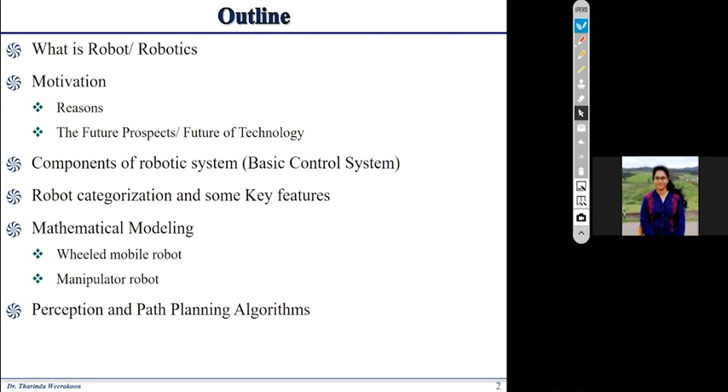And one of the main topics that we are talking about under that perception is path planning. Sometimes we use different words, navigation, motion planning, trajectory planning, and all those are related, but they are different things. We will discuss those things today.

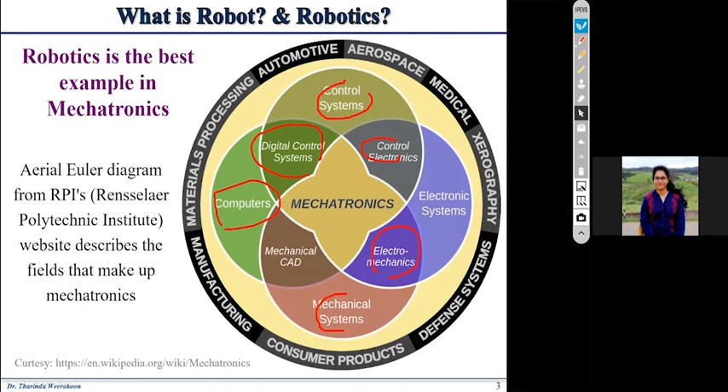So that is mechatronics, and the best example, people in this field say, is robotics. So if you are going to study robotics, you have to study all those things. It's a big challenge, but interesting, and there are so many advantages. We will discuss those things in the coming few slides.

So then the motivation, or why robotics is important, why we should study robotics, or why you have selected to study robotics. I have selected a couple of reasons that you may or may not have thought about before, but from today, you can think in a different way why robotics is important for our society. The first one I have selected is a sustainable food future by 2050. There is a big connection of robotics to this first reason. The second one is industrial revolution. Now we are in the era of Industry 4.0, as well as moving towards Industry 5.0.

Or somewhere in the middle of Industry 4.0 and 5.0, right? We will discuss the key role of robotics in Industry 4.0 as well as 5.0. In addition to that, I have given two other keywords, right?

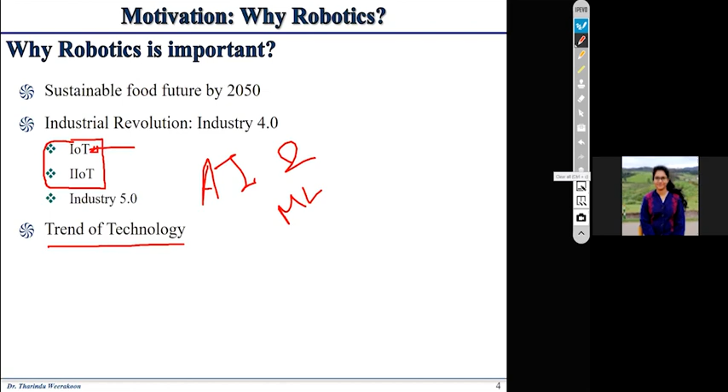Okay, so with that motivation, what we have to analyze is whether we can produce that amount of food. So now, I think you can see my writing, right? Yes, sir, we can see.

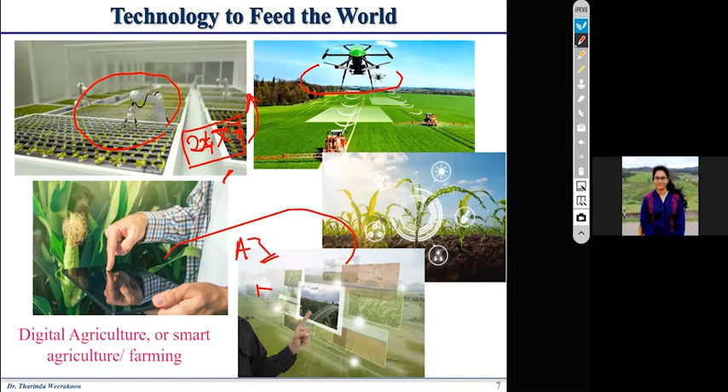Okay, so with that, we will move to the next one. Next reason: the Industrial Revolution. So now we are here, in between 4.0 and 5.0. Even though we are talking about Industry 4.0, we are actually in between those two phases, or in the transition period. This indicates there's a big role for robots to play. Not only that, if you compare with Industry 3.0, those were automated; these are autonomous, and they are connected to the internet. That's why IIoT becomes a hot topic nowadays. Industries are connected through the internet; industry is one element in that network. Therefore, it's very important to study robotics and related fields: AI, machine learning, computer science, and all those things.

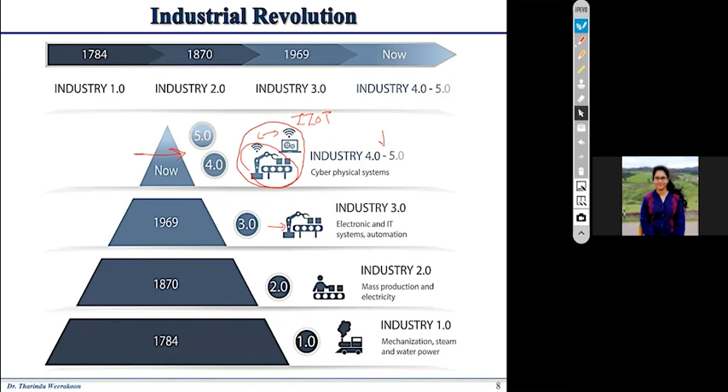The next one is IIoT, which I explained in the previous slide. This is the very fundamental, basic structure that can be used to explain IIoT. Here you can see robotics, manufacturing industries, then smart grid, a completely different one, also producing products. Smart power utility, smart communication, smart cities, smart cars are all connected to this IIoT grid. Then all will communicate with each other towards a better life, producing effective and precise service. That's the objective of introducing IIoT as the next step of IoT.

So we have discussed IoT for a couple of decades, but now we are talking about IIoT, and you may find different words like Internet of Everything, IoE, as keywords on the web. They are pointing to different things.

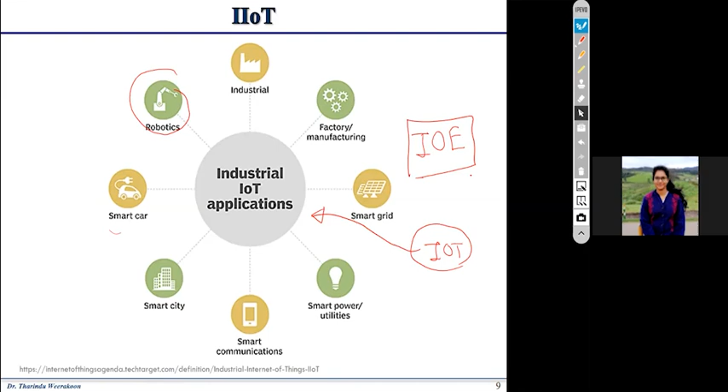Then, if you think about the robotics, the role of robotics in that IIoT, or let's say simply future. Here, I have just put a few pictures only to get some sort of idea about the robotics. In the manufacturing industry nowadays, all the manufacturing industries are converting towards the fully autonomous industry. So in Sri Lanka also, there are some manufacturing industries converting now to the autonomous industry.

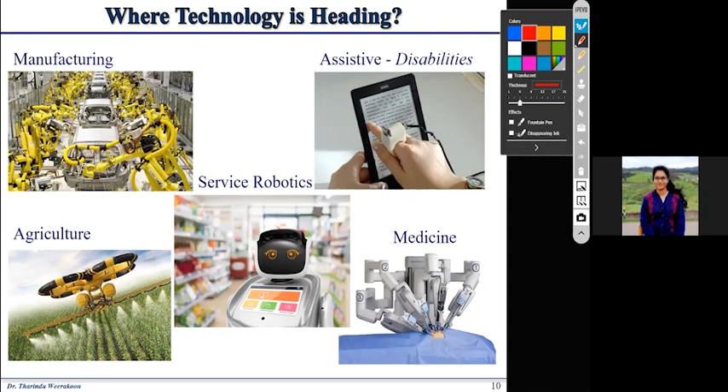Okay, so then here, the service robot, it's one of the interesting ones. You can find those kinds of robots in developed countries like Singapore, Japan, China, European countries and Australia. Those robots can be found in shopping malls, hospitals, and some elderly homes. And in medicine, there was a big revolution a couple of years ago. Some roboticians have developed this kind of surgical robot. It will be commercialized and spread around the world in a couple of years.

Okay, then assistive robots. This is one of the hot topics in the field of robotics, as well as this one, smart agriculture. Those are the hot topics people are talking about in the field of robotics nowadays. Because medical robots are a little bit expensive and lack facilities at the moment, but in future we are expecting to have some facilities in this field as well. But we can easily develop something in these three areas: service robots, agriculture robots, and assistive robots.

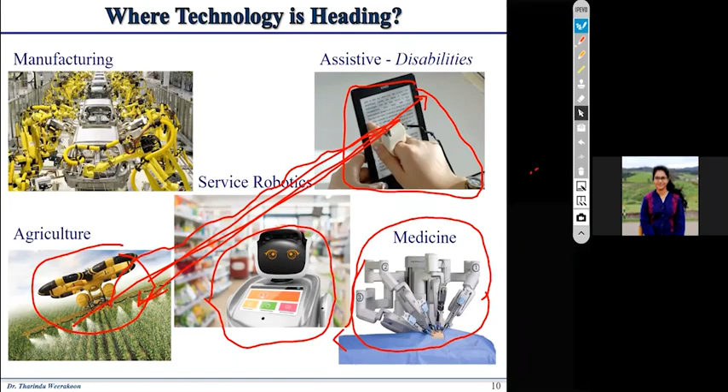Okay. So the other reasons. Those are the reasons that you may already have had before listening to the reasons I explained. There may be a good job market for robotics in future, and it's a field that integrates different fields of specialization like computer science, mechanics, electrical, electronic, and so on. Then you can come up with extremely creative and interesting ideas, people will praise you, and you can easily hit in the field of robotics. Then you can serve society as well as the economy and the environment with a big impact, and it will be a marketable topic nowadays.

Therefore, you have decided to study robotics. I don't know actually, but you can think about the reasons why you wanted to study robotics. There are plenty of opportunities to come up with new things, innovations. And there are so many social, economical, environmental problems people are still struggling to solve. Then you can give a solution using the existing technology, and introduce it as a robotic application that you have designed and developed to solve that social, economical or environmental problem.

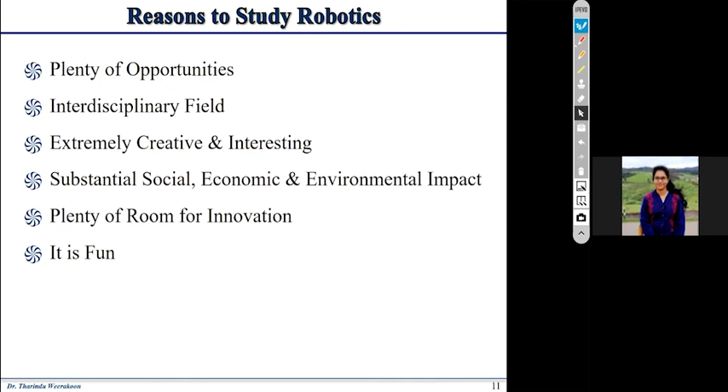Okay, then I will give some facts about world robot density. This survey was done in 2019, and according to this survey by this organization, South Korea is the leading country, next Japan, but in some documents or articles, Singapore is leading South Korea, with about 915 robots used as robot workers per 10,000 employees. That information is not in this article, but I should say the first is Singapore. Then second place is Japan, then Germany, Sweden, US, Italy, and so on. China is there.

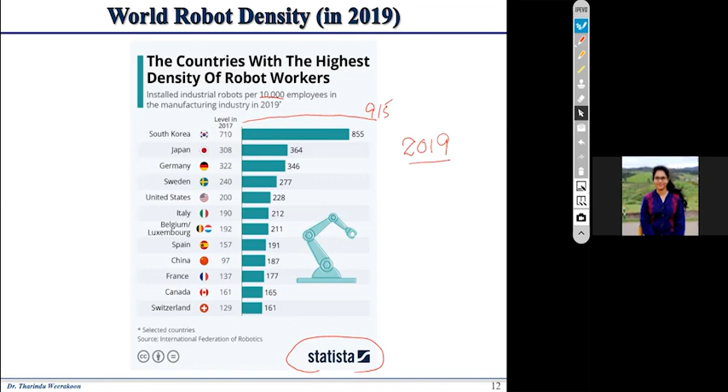Then growth of robots, or the forecast. In the previous slide, we discussed the situation at the moment, but what will happen in 2025? This study was done in 2017, a little bit old data, but still we can think that this demand or growth is increasing, not decreasing.

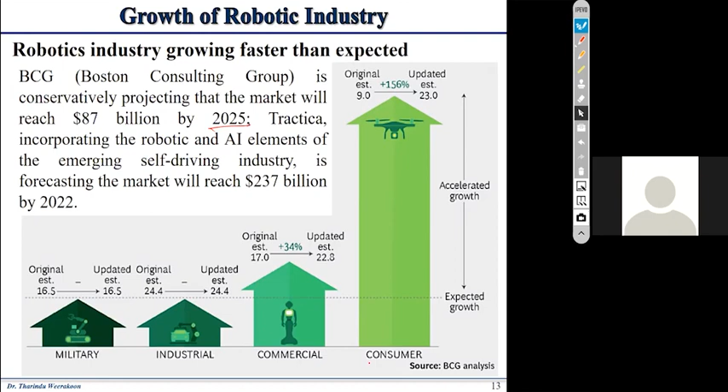If they do the same survey again, probably they will come up with higher values, or higher numbers. So the highest demand goes to the consumer type products. For example, drones: drone delivery, drone for smart agriculture, and drone for surveying. And there are so many applications that we can use drones for

even nowadays, but we'll see what will happen by 2025, whether we will be able to see that kind of robot drone applications in the world. Then this is limited because the number of industries will not increase. The manufacturing industry is limited because they are used in those places only. And supermarkets and hospitals use service robots, or commercial sales representative or salesman robots. Then here the robot manipulators are used.

And in the military applications also we can see some robots are used, especially the US is funding more dollars for this research, billions of dollars. Also, we can find so many MSc and PhD opportunities under those applications. So we'll see what will happen to this, because the capital investment for this kind of research and development is less compared to the others. That might be a reason, but I'm not sure exactly, for the demand increase in consumer type robotics.

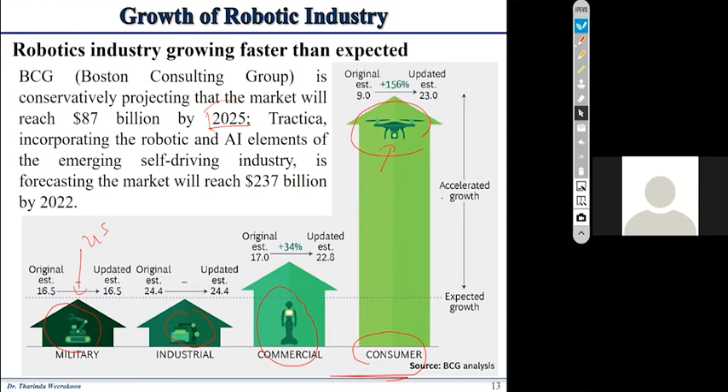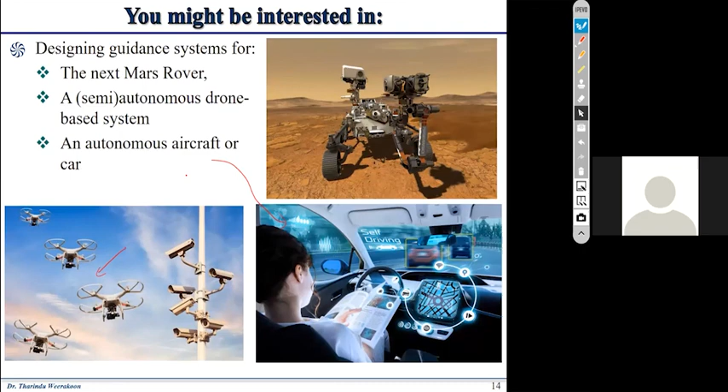Then I guess you are interested in robotics because of these reasons. You want to design a robot like a wheeled mobile robot or semi-autonomous drone or drone colony, using swarm techniques, or sometimes we call multi-agent robots. And sometimes you want to develop a self-driving car or some applications for the self-driving car using AI techniques. And you want to do something on industrial robots.

Because nowadays industries in Sri Lanka, as well as most of the industries in developing countries, are converting or transferring to autonomous industries. The trend is a little low, but there are so many problems in that field as well. You can come up with some solutions, and that may be the reason you are here to do robotics study, to come up with some algorithms or development in industrial robots.

Some of you may be interested in biomedical robots, surgical robots or some humanoid robots. There may be so many reasons. But the thing is that you have to know something about control engineering. Within those systems, control is there. Control is the main part.

If this is the robot, input will be given and you are expecting some output from the robot. So these are three elements of the control system. Any system can be divided into these three. In any complex system, you can identify the input or inputs, then the process, and output or outputs. So we will talk about how to come up with this kind of model and how to design that. That is actually called mathematical modeling. That is one of the topics that I want to discuss today.

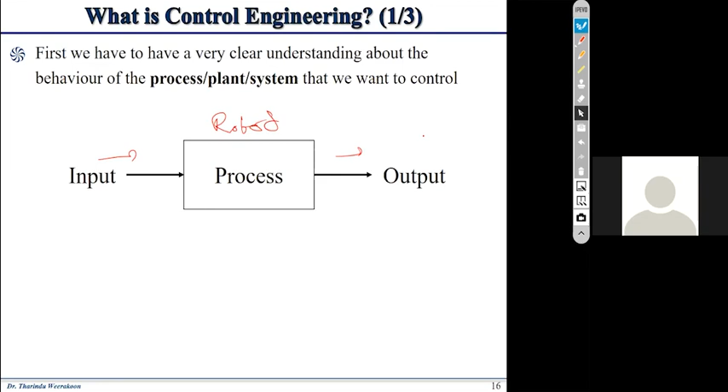So then, if I expand those three elements into these blocks: controller, actuator, and the process. There is a process, and from that processing we have to actuate, or give the signal to move that part of the robot. If it is a robot, there should be something called an actuator. For example, it can be a motor. The simplest example that comes to mind is a motor. A motor will actuate something, rotate something, rotate a robot arm or rotate a wheel.

To do that action, this controller is essential to send the control signal: rotate clockwise or rotate counterclockwise, and rotate this much of angle. That command will be fed by this controller, and the controller will get the input from the operator, or this is our desired output actually. We want to move that robot from here to there. Therefore, we give that command, then the system will work according to that given command.

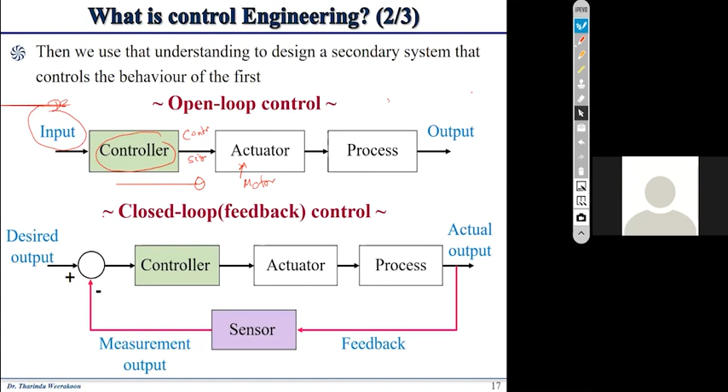But this will not do the job properly. That's why we introduce the closed loop feedback system. I'm not going to explain more about those things because of the time restriction. I'll try my best to finish this talk within 1.5 hours.

So if we talk about the closed loop system, in order to get precise motion and precise output at the end, we have to have this kind of sensory system. We measure the actual operation or output of the system, and then we compare that with the desired output. And the controller, actuator, and process part, or the plant, together will act to reach that goal. So you have to learn more about control engineering if you are going to do design in robotics. Control is very much essential in robotics.

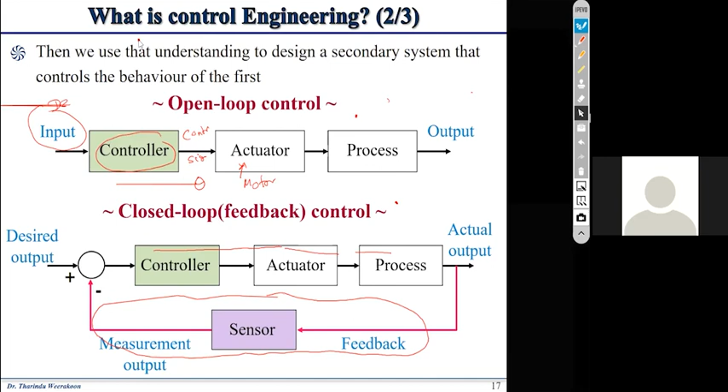Okay, I will skip this one. These are the things I have explained before, and mathematical modeling. So mathematical modeling is the representation of that process by a set of equations. We are working on these sets of equations because our objective is to design and analyze a system that can be used to control our robot. The robot is there, we have to design a controller, and that controller will execute the commands that we send in order to do something using the robot. Therefore, we have to have some set of mathematical equations.

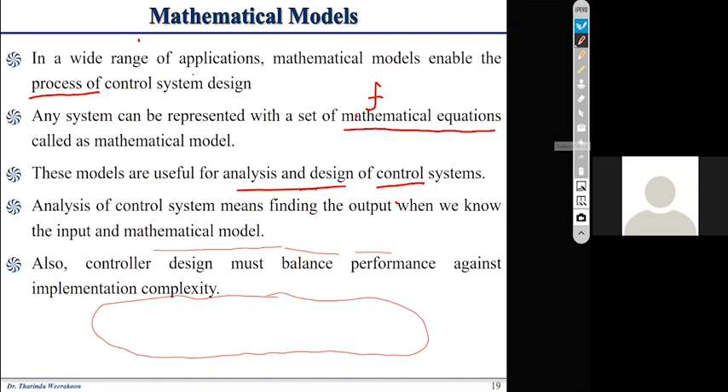Those equations will represent the process or, let's say, the robot. Then mathematical modeling is very important, and we will discuss those things a couple of times. Okay. Then, this is just about single variable control. We have only one input, one output, right? Then we can use this feedback system to have the exact or expected output at the end.

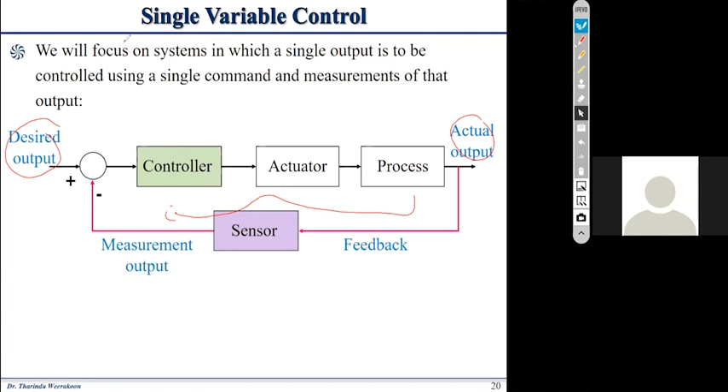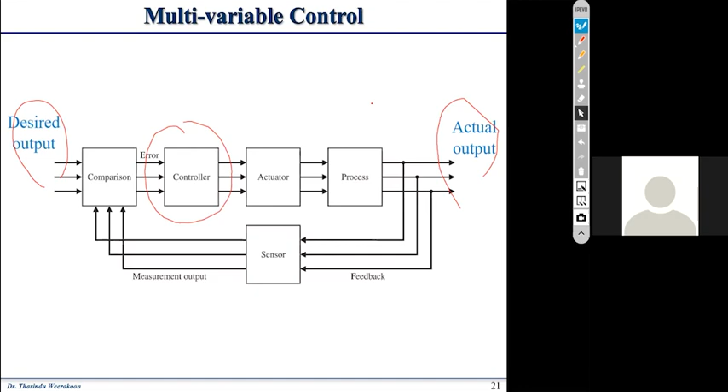But if we consider if there are multiple inputs, and there may be multiple outputs, not only one output, we will come up with a little bit of complex system design, right? Such systems are called multivariable systems, and the controllers that we are targeting to design are called multivariable control. Those are actually just facts. If you are interested in designing or developing a robot, you have to go through those things a little bit at least, right?

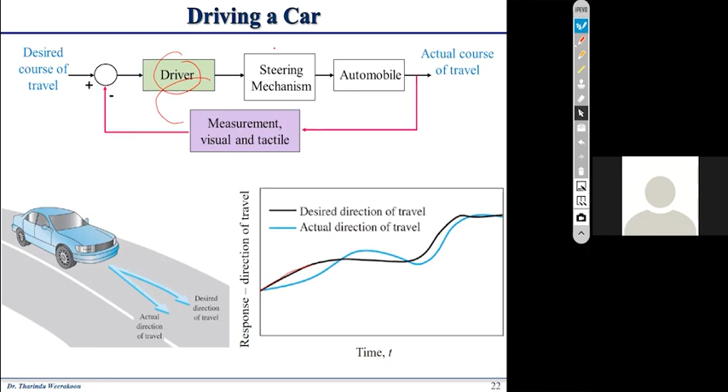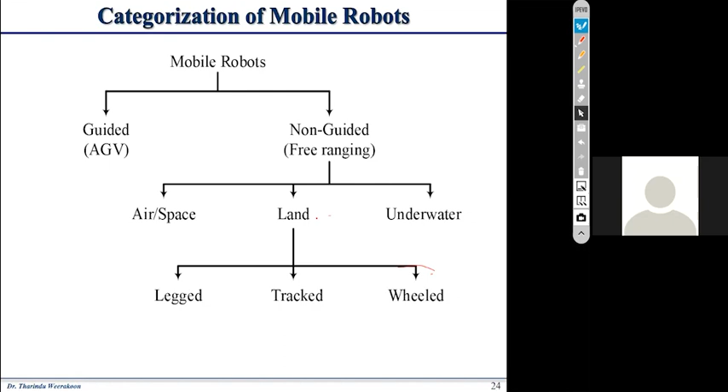Okay, so then, autonomous mobile robot. If we go to the previous one, what we are talking about under this talk is actually the autonomous wheeled mobile robot and the robot manipulator. And here there are some capabilities for having a fully autonomous mobile robot. A robot can be put under fully autonomous robots if it has the capability of gaining information about the environment. That is the first capability. The second one is to work for an extended period without human assistance, so the robot should be capable of thinking and deciding what it should do without any assistance of the operator.

Then move itself in its operating environment, meaning that we have to design the robot's brain in such a way that it moves from one location to another with these capabilities, avoiding obstacles and without causing any harm to the people in the environment. So then, in order to achieve those capabilities, what we need is robot sensing. The robot should perform path or trajectory planning and then control.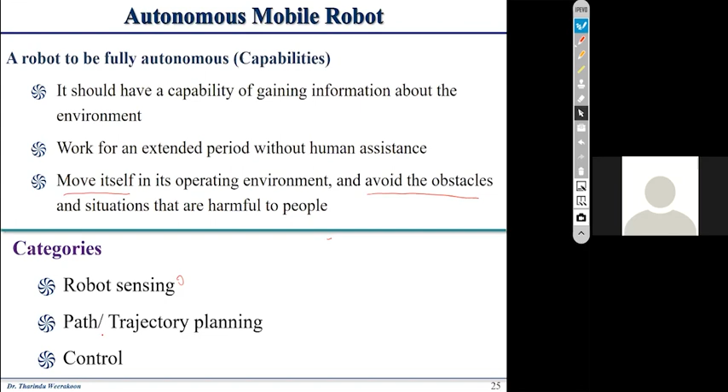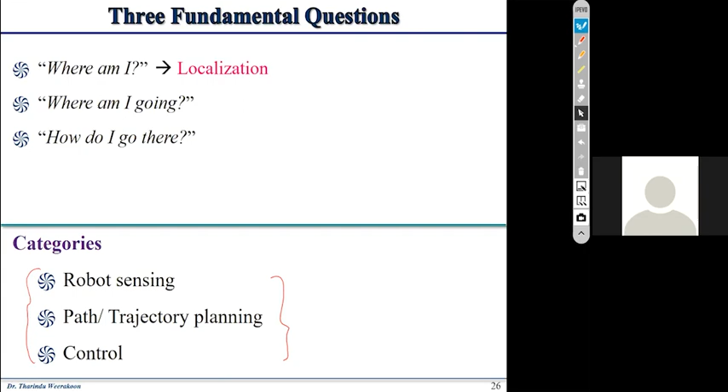So these are the three fundamental questions if we are targeting these three things. Where am I? I means the robot. The robot should know where it is. We can answer that by localization. Robot localization means we have to develop an algorithm such that the robot is capable of finding where it is. Where am I going? Then mapping is a solution for that. And on that map, the robot should know where it should go.

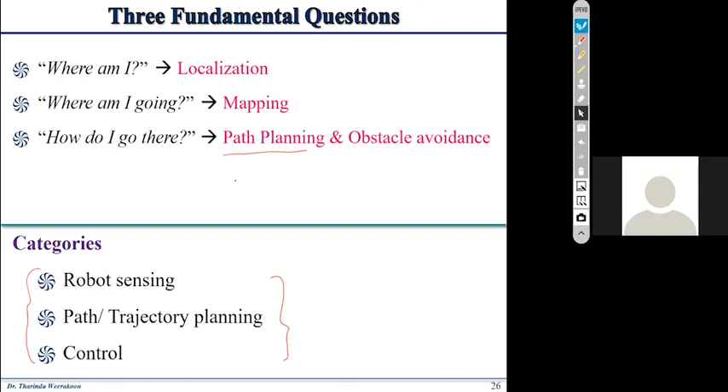Then how do I go there? That can be done through path planning and obstacle avoidance algorithms. Those are the key things we should study if we are going for advanced robotics, meaning autonomous robot design. Okay. Then what are the challenges in order to achieve those capabilities, or to give the solution for these three questions? If we can develop a robot that can self-answer these three questions, then we can say that robot is an autonomous robot. Otherwise, it will be a semi-autonomous or automated robot.

Today we will try to discuss obstacle avoidance and path planning algorithms, and later you will get a chance to listen to sensor fusion techniques, and also how to detect the landmarks and objects, right, in the next couple of webinars.

Okay. So depending upon the prior knowledge and information that the robot can gather through its sensors, as well as the capabilities, as we discussed before, 3 capabilities, whether the robot can achieve those capabilities or not, we can talk about the autonomy of the robot. Then we can put whatever robot we have under these 3 autonomy classes.

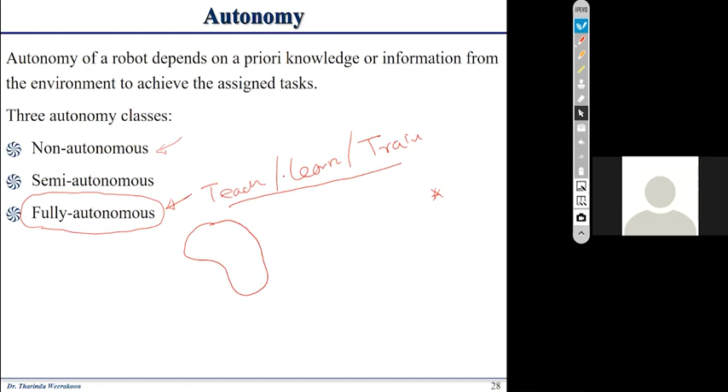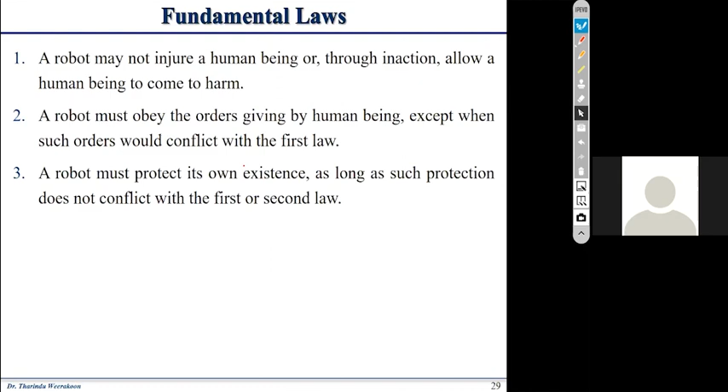And if you look at the components of the robot control system, as we discussed before, we have a sensory system, controller, and actuator. This will probably be discussed in the next seminar, and later you will see how we can extract the information and how sensor fusion can be done. And today my objective is to show how to come up with a set of equations for this actuating part, right?

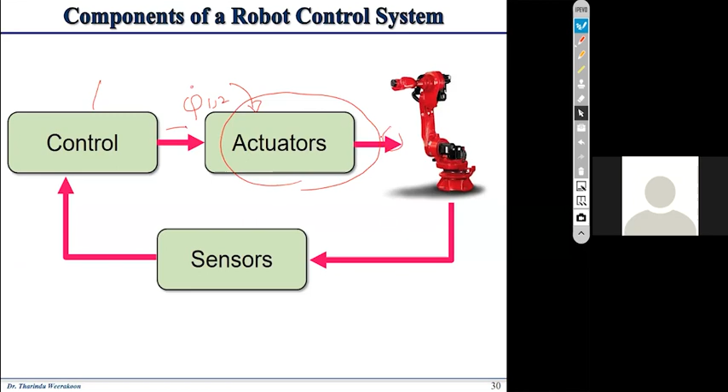Okay, so then if this is a mobile robot, that robot will move at that speed in that direction. We calculate it as the theta here. Theta is the direction with respect to the global frame, right? And V is in terms of x dot and y dot. X dot is Vx and y dot is Vy.

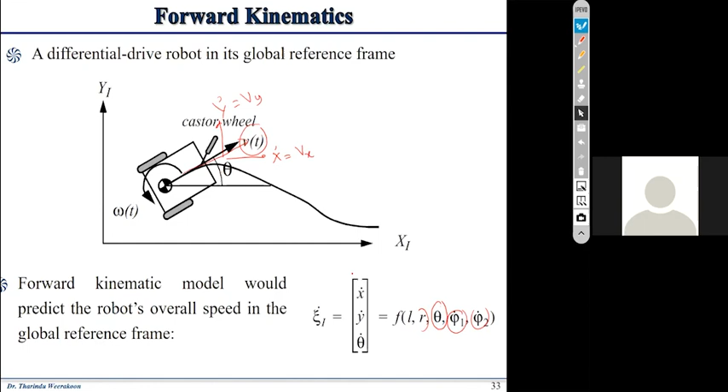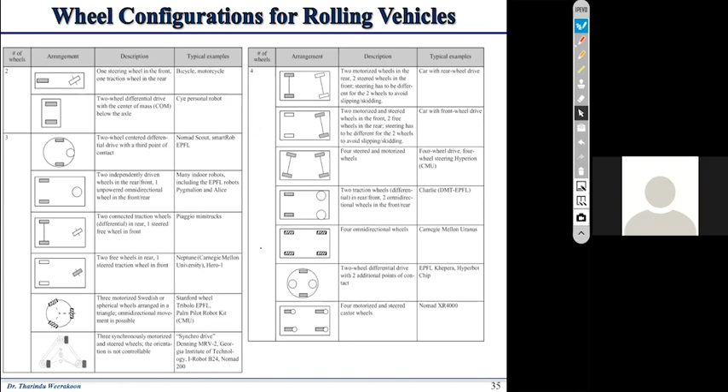XY components of the velocity of the robot. And this theta is the direction with respect to the global frame. And speed can be decided through these phi 1 and phi 2 dots. Okay, that is the mathematical model, and you can find different wheel configurations: two-wheel robots, three-wheel robots, and some typical applications. I have extracted this from a textbook. Four-wheel robots, and sometimes six-wheel robots.

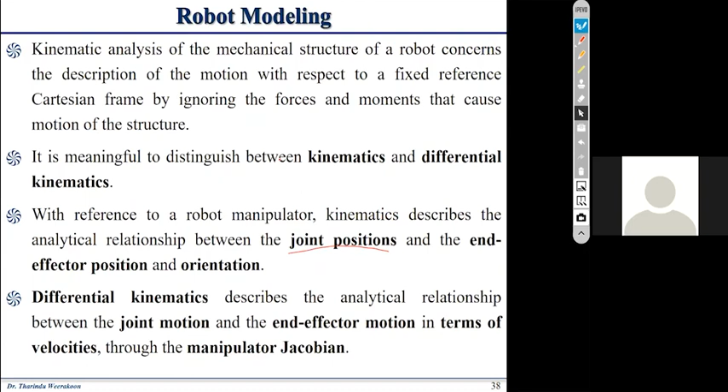Okay, and next we will talk about the robot manipulator. There we have to talk about joint position or joint angle and end effector position and orientation. Then we will try to understand position and orientation, and the coordinate system or frame.

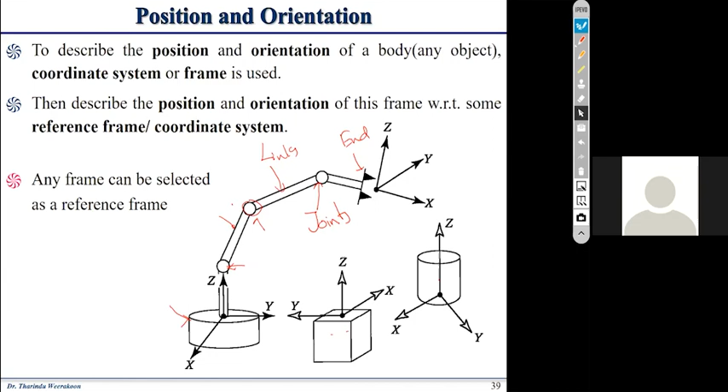And there are two objects, right? Each object may or may not have a frame. We can define them if we are going to use those frames. They are called the object frames. Okay. So then we can define some problems. If you want to calculate the position and orientation of the robot manipulator, geometrical parameters should be given, the lengths, right?

Then the angle theta. So if you know the length and theta, you can use simple geometry and calculate the orientation and the position of this end effector with respect to this vector. Vector means the distance and xy coordinate and the orientation of this end effector. Simply, the manipulator geometrical parameters should be given. Then you can find the position and orientation of the manipulator.

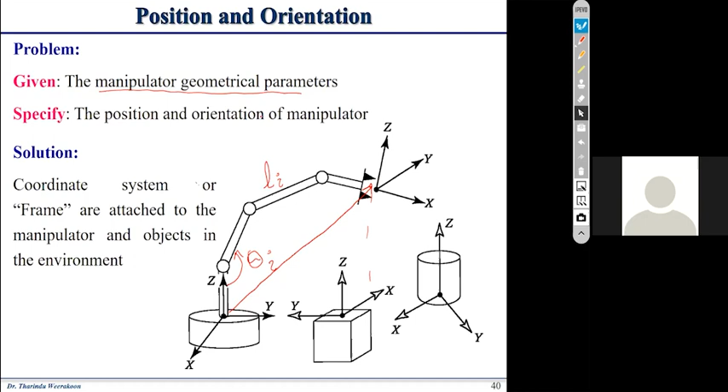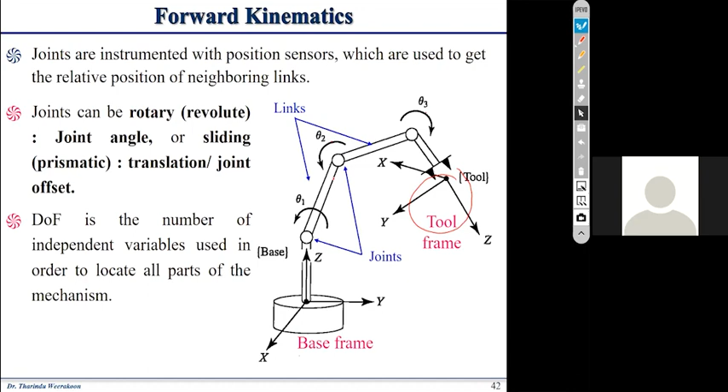Then in kinematics, we have forward kinematics. It means that these joint angles of rotation are given, theta 1, theta 2, theta 3, and we are asked to find the tool frame, or the position and orientation of the end effector. So it is straightforward. In inverse kinematics, what we are given is the requirement.

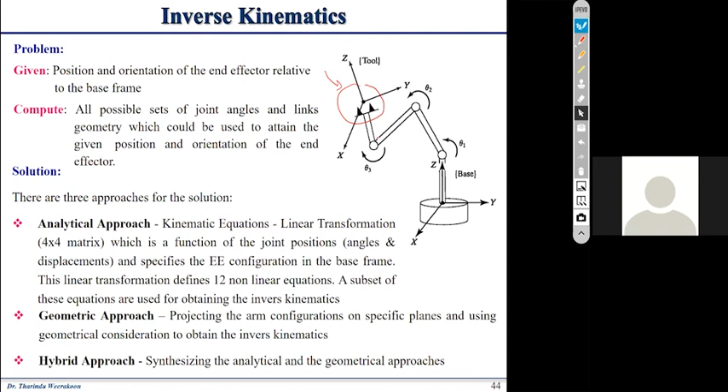This requirement, the end effector or the tool should be in this position and orientation, and we ask to calculate theta 1, theta 2, and theta 3. We want to calculate those things, right? Okay, so those are the two different kinematics, and I will skip those things.

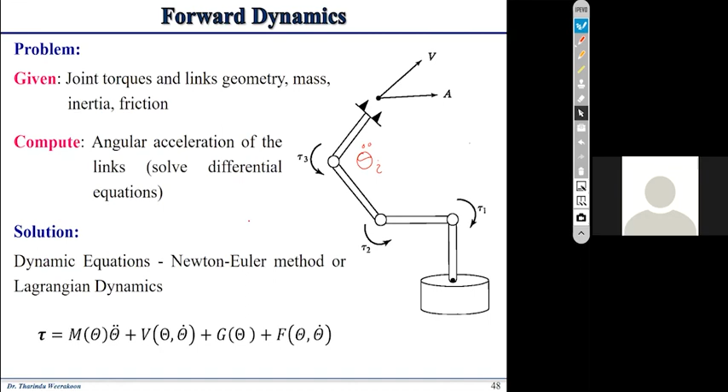Then in inverse dynamics, we have to calculate the joint torques, right? So in the previous case, forward dynamics, torque values are given, and we have to calculate theta double dot. And in this case, accelerations, velocities, all those are given, and we have to calculate the amount of torque that should be generated by the motor at each joint, right, in order to achieve these accelerations and velocities.

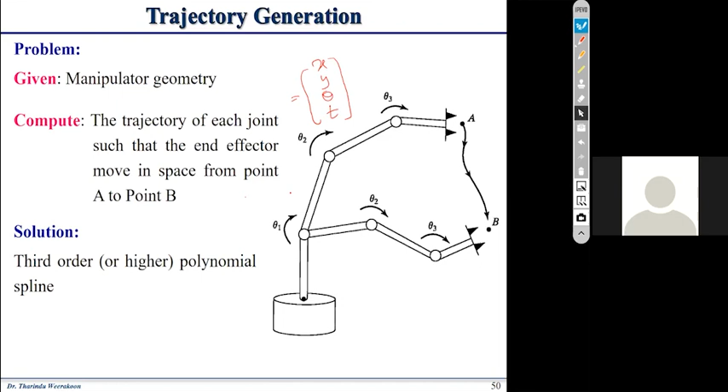Okay, position control is how that position is controlled. Always we have to think about how these three variables are controlled, right, with respect to the time.

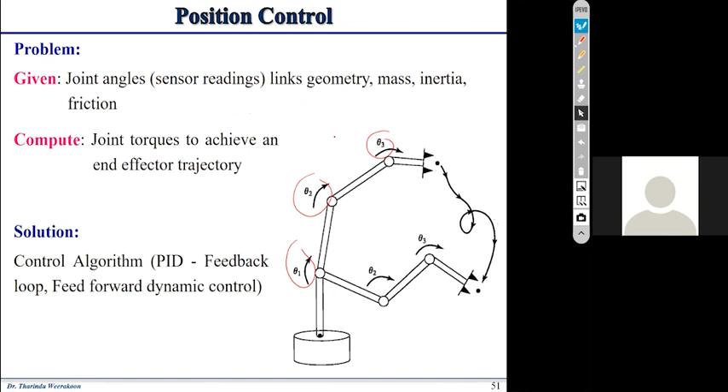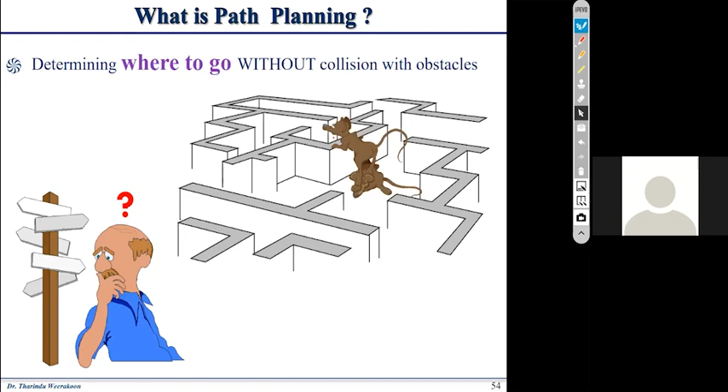Perception, right? So I try to finish this in 10 minutes. It is kind of path planning. The basic one is path planning, right? Determine where to go without collision with the obstacle. You have to find a path towards the goal without colliding with the obstacle. The path planning problems can be categorized into two depending upon the environment: path planning problems in static environment and dynamic environment, and they can be again divided. That environment can be known, unknown, or partially known, right? So likewise, many algorithms have been proposed to solve those path planning problems.

These are the classical methods: road mapping, cell decomposition, artificial potential field. That's one of the highly employed algorithms, right? Easy to implement, but there are some issues. Mathematical programming, but computational cost is a bit higher than the other one, right? The APF. Then likewise, you can find different classical techniques as well as heuristic-based approaches.

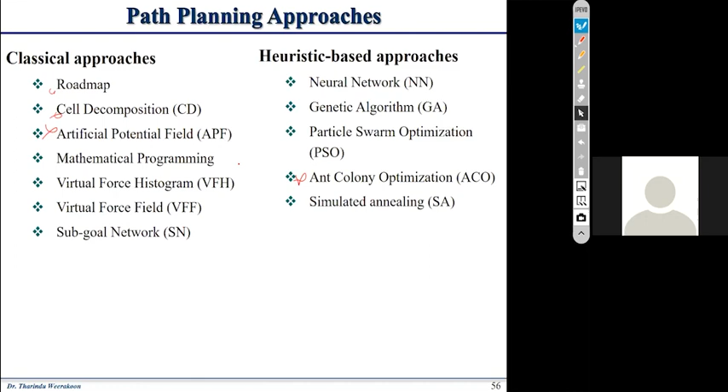We let those algorithms learn themselves and perform the given task, right? So we are not defining any parameter for these algorithms, and we let the algorithm learn and perform. So artificial neural network, genetic algorithm, then particle swarm optimization and ant colony optimization. We will talk about this one and these few today, right? Just with some graphical representations without any equations.

I will use some equations for APF, but this is one of the roadmaps, visibility graph and Voronoi diagram. Okay? So here what you can see is all the nodes are connected, and on those lines the algorithm finds the most possible path, not the shortest, towards the goal without any collision with the obstacle. But this is a little bit computationally costly if the environment is a bit complex, right? And we can use this for static environments only.

And the next one is here: we connect the nearest points and take the middle point, and here also take the middle point and connect all those points. Then we can find the path having the maximum clearance to the obstacles. But here you can see there is a minimum clearance to the obstacle, right? Okay, then we can introduce some sort of safe margin when we are designing this obstacle space. These black areas are called obstacles, or obstacle space, and the white area is free space, obstacle-free space.

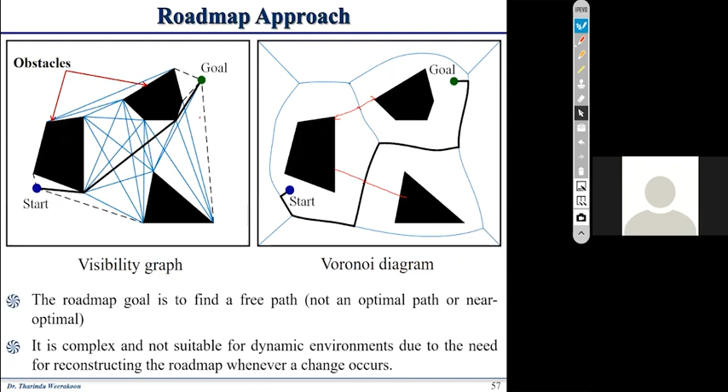The second one is ACD, approximate cell decomposition, and we have to divide and subdivide the cells, right, in such a way that we can find the obstacle free cells, and we can link from here towards the goal, right? All those algorithms we discussed so far can be applied or easily applicable in static environment where there is no moving obstacles, right?

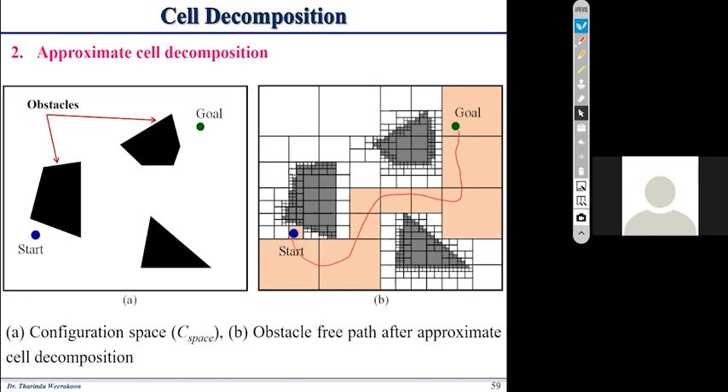Okay, so then the next one is artificial potential field. This one can be used in any environment, right? Static or dynamic, known or unknown, right? What it does is it will produce two forces, attractive and repulsive force. Attractive force of this robot towards the goal and repulsive force between the robot and the obstacle, right? Push the robot away from the obstacle and attract the robot towards the goal.

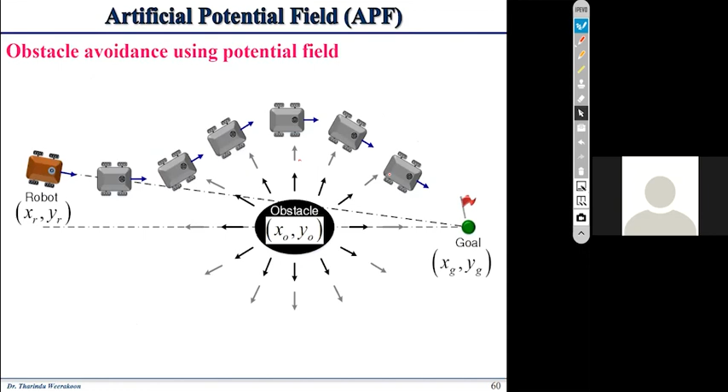And at the end, if we have a number of obstacles, we have to calculate the total repulsive force, and then we can actually represent those things as a potential field into the environment, right? So what we can see is here, these are the vector fields, right? And you can connect all these arrows, right? Then if you put a robot on this line, this robot will move along this line, right? Okay, so if you put a robot here, right, this will follow this line towards the goal.

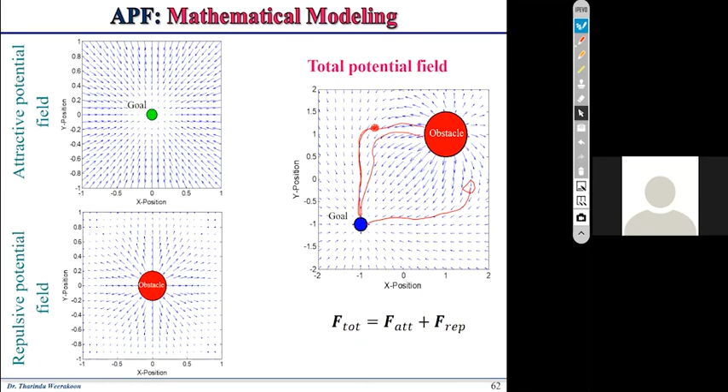So it's pretty simple to implement in our computers as well as small microprocessors, right? Okay, that's why this algorithm is widely used in mobile planning, and there is one disadvantage of using this: local minima or deadlock is the key problem associated with this APF. There are ways to overcome such issues, right?

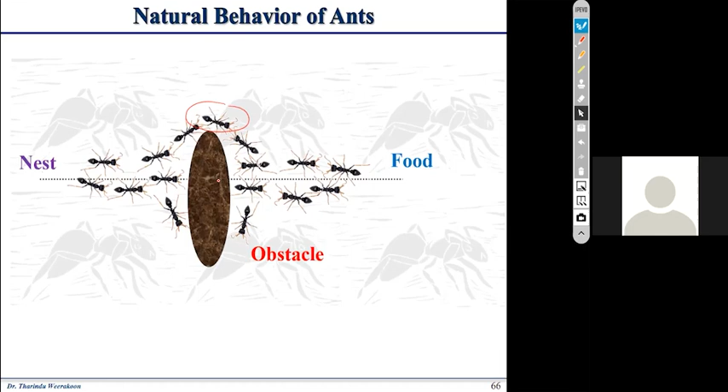Then once these ants have found the path, that message will pass to the others, and then all the other ants that moved away before from that path will be attracted towards that shortest path, right? Okay, this one has found a path, and they have not found a path yet.

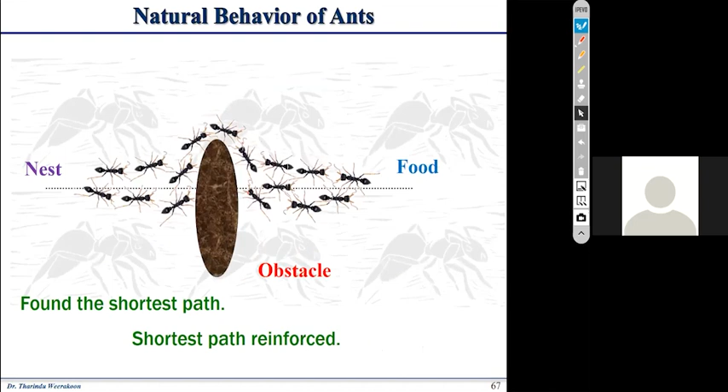Then what they do is, because of this communication protocol, they will turn back to follow the others, right? Okay, so something like this. That is called the ant colony optimization technique, right? Okay, so likewise here I have summarized some path planning techniques, right?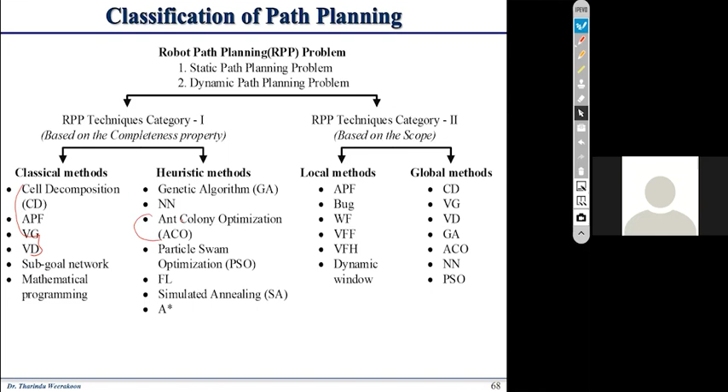So we roughly went through these three or four classical methods and the ant colony optimization technique, just to look at what's happening inside them, right? And here we can find their advantages and disadvantages. Basically, if we go for the classical methods, they are computationally heavy algorithms, right?

If the environment is getting complex, then we have to spend more time to find a path. But some of the algorithms are not suitable for what is called dynamic environments, right?

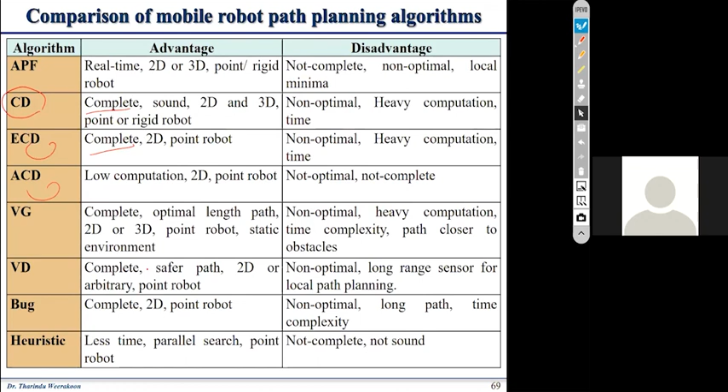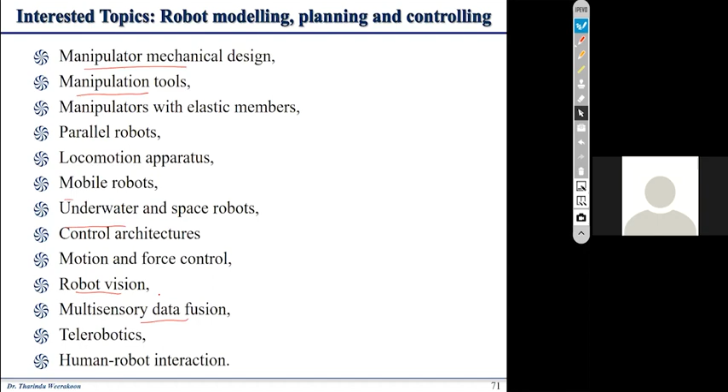You can find many articles published. Nowadays most of the articles are free, right? Then IROS is the second one, and likewise you can find so many resources on the web. That's all about the overview of robotics and path planning. I used fewer equations but more facts to give some idea about the controlling of robots and path planning.